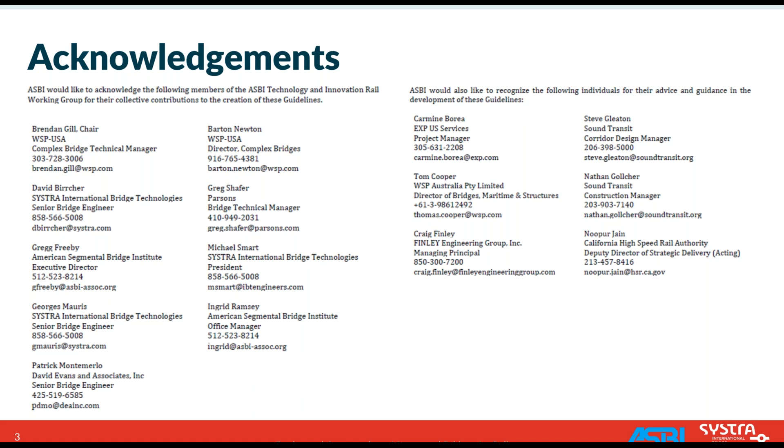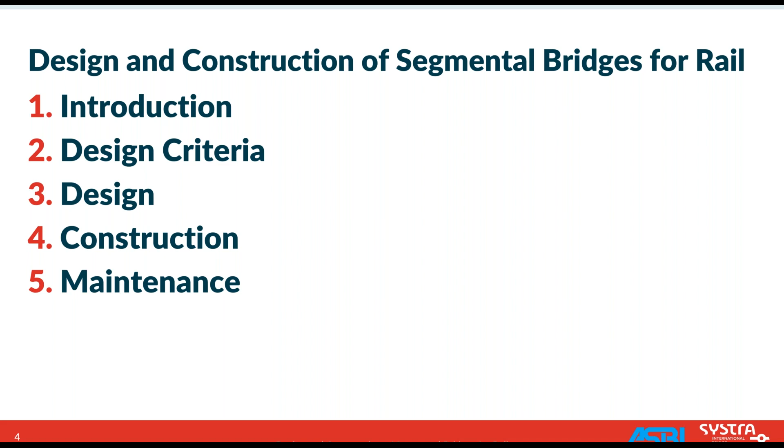So, introduction: everything you know about segmental highway bridges applies to segmental rail bridges, so no knowledge lost there. But there are a few things that make segmental rail bridges unique, and that's essentially the purpose of the guidelines and what we're going to be talking about today. What are those things? It'll be a little scattershot, since there are a bunch of different issues that'll all kind of come at you, but we'll try to hit them one at a time, and hopefully you'll get a feel for what makes segmental rail bridges unique.

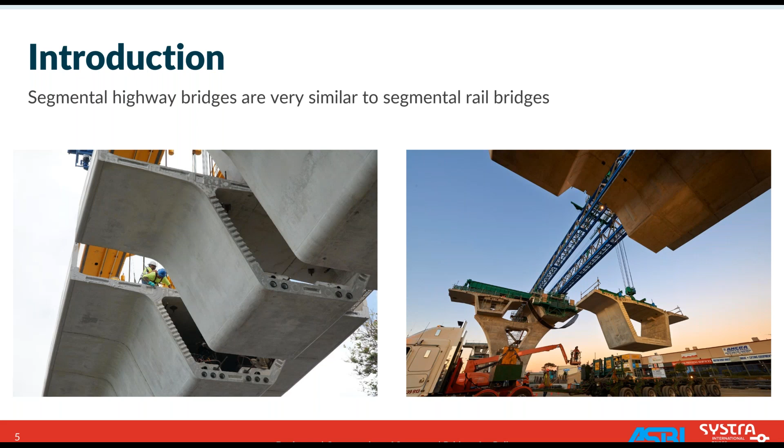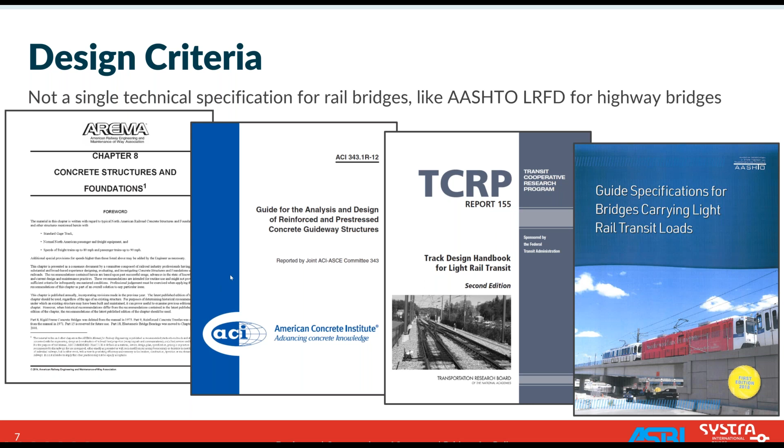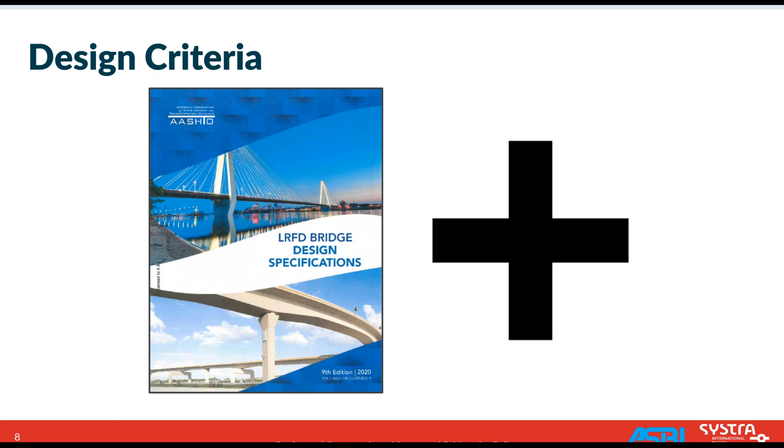So what does that mean? Well, typically you still want to rely on AASHTO LRFD for the fact that it's up to date and constantly being kept state of the art. But things need to be added to it -- there's this 'plus' that needs to be added to accommodate special considerations for rail, whether it's loads, load combinations, or different performance criteria. That typically takes place through a project-specific design criteria.

There are a handful of examples from previous projects and other owner agencies in the guidelines in chapter 3. I have them highlighted there on the screen, along with a handful of important considerations when preparing one of these project design criteria.

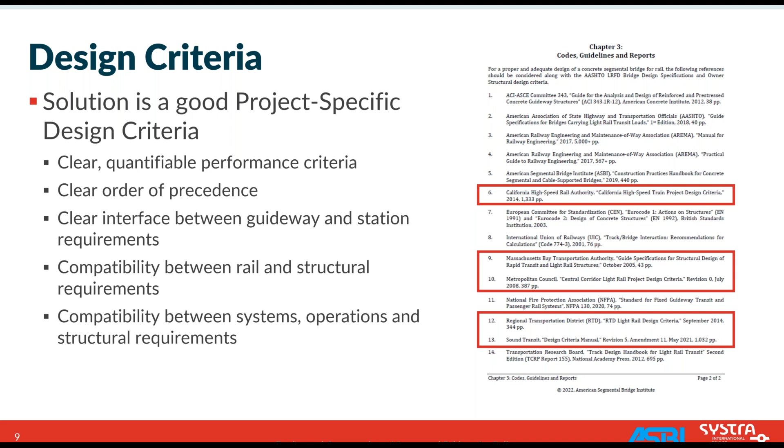Can't emphasize enough the need to do a good job here. You've got to be thorough, you've got to be clear, comprehensive, and there's really no wasted time in preparing these documents, because it'll directly affect how well the project goes. We want quantifiable criteria, clear order of precedence, and some idea of how the guideway and station have different requirements for those structures. What are we designing each to? Which codes? How are they interfaced? Can't emphasize enough the importance of a good design criteria.

Let's talk a little bit now about some design topics, starting with span type. Segmental rail bridges are often simply supported structures in the 100 to 120, 130 foot range, which is very common.

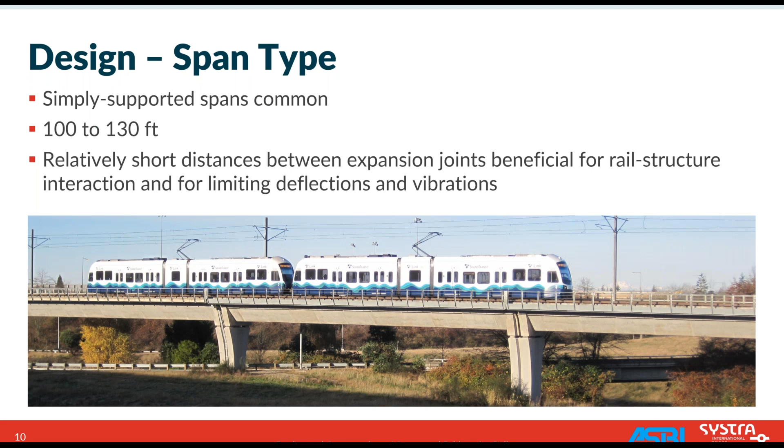These relatively short distances between the expansion joints are good for both rail structure interaction and for limiting deflections and vibrations. They're also easy to construct, which makes them an attractive choice.

One issue that sometimes comes up with these short, simple spans is that rail bridges will have some special track work, whether crossovers or switches. And oftentimes the special track work doesn't work well when it's adjacent to a movement joint, a structural expansion joint that has some movement.

To get around this, we use link slab details. These details have been around for a long time, both in rail bridges and highway bridges, often to reduce the number of expansion joints you might have. Effectively what they do is replace the plinths with a big concrete continuous slab across the joint that the track work can attach to.

Of course, sometimes you have to have a long span structure or a multi-span unit, and that is obviously possible. Some attention needs to be paid to these different performance criteria that we'll talk about in a bit regarding rail structure interaction.

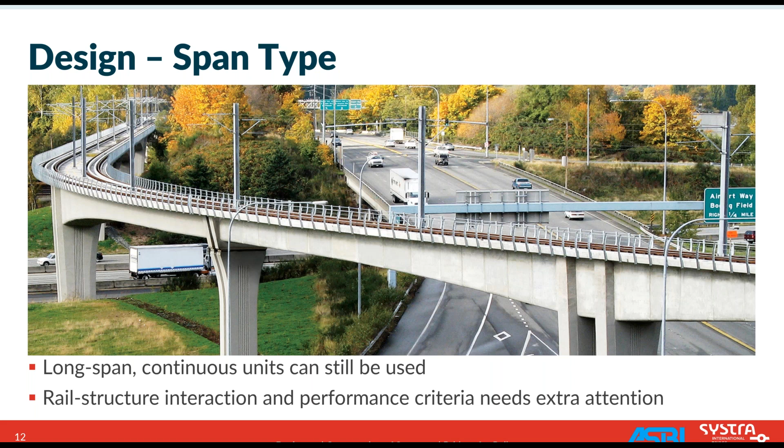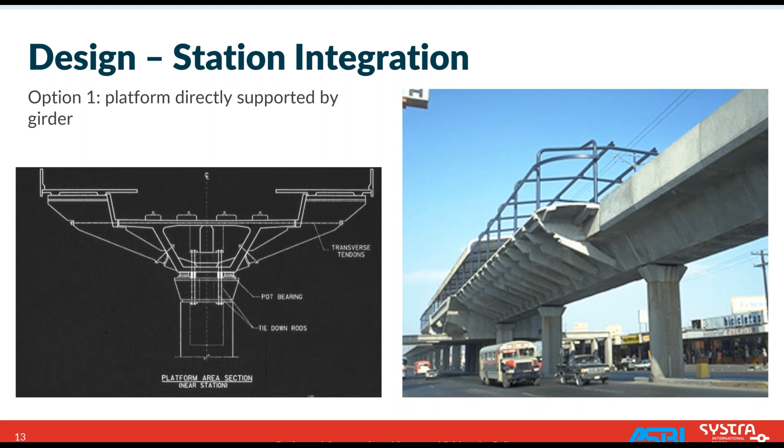Next we'll talk a little bit about station integration. This is obviously specific to rail structures. Typically we classify how the guideway and the station interact by 3 different options. Option 1 is the platform directly supported by the girder - that's pretty self-explanatory, shown in the pictures here.

Option 2 is more of an indirect connection, often happening with a shared foundation. The picture on the left is under construction, but you can see there's a central dual box guideway going right through the middle through these integral hammerhead bents. On either side of the hammerhead bents, you can see concrete blocks that are eventually going to support station platforms on each side of that central guideway.

So this is an outside platform configuration. It's pretty easy on the guideway here because it can just run straight through, with platforms on either side. There's also a center platform configuration shown in the rendering on the right. Here the box is split, so there are single track boxes on either side of the center platform, but this also shares the foundation with the station, and has been successfully implemented on several projects as well.

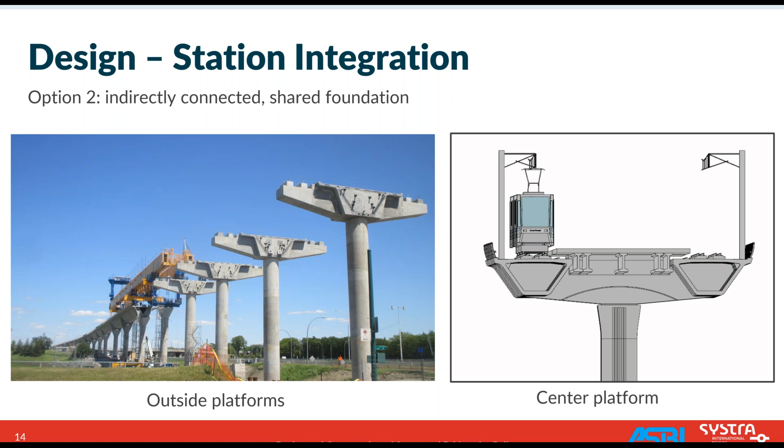I'd say the last category is independent structures. You may have a really large station structure like you see in the picture on the left, where the guideway coming in on the right of the picture effectively stops at the interface with the station. Or you may have something like shown in the graphic on the right, where you have independent guideways and a station structure that don't interact at all.

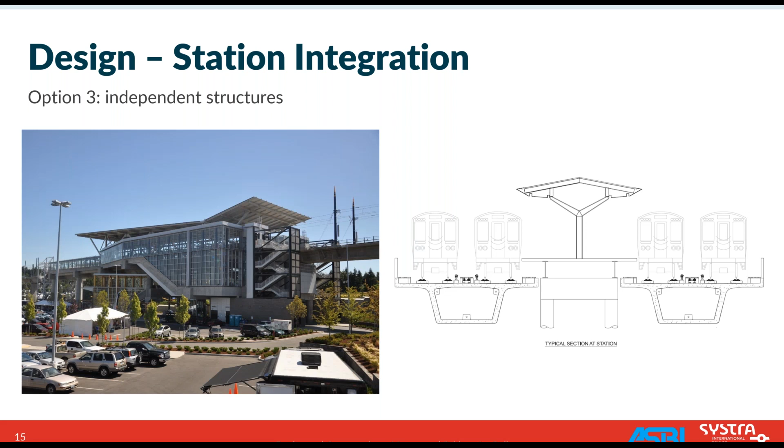So how do we sum up? The issue of a center or outside platform is typically outside of our control, as bridge engineers. Operational considerations will likely determine that. But what you would still want to have is clear design criteria, as we mentioned before. Whose responsibility is it? Who's designing, or what code are we using for what?

That's always a sticky topic, and then it's all about coordination at that point. Coordination is one of those things you'll hear me say a few times today - it's easy to say and hard to do. And it can be even harder if design schedules do not match up.

What does that mean? Well, oftentimes for precast segmental, the design schedule for the segments gets accelerated because they want to start casting segments ahead of time. So what ends up happening is you may need to coordinate with a certain discipline, but you're at 100% design, whereas they might only be at 30%. This makes the coordination job even harder to get what you need out of it. So getting these design schedules compatible is a really important thing.

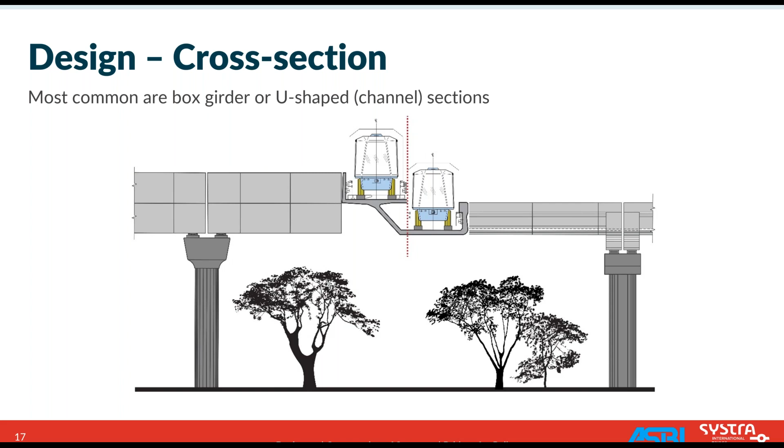They have a couple different configurations. There's a wide U, which is analogous to the dual track box girder you see on the screen. That wide U will support two different tracks. Visually there's a little less depth associated with the U, and it also can accommodate more vertical clearance.

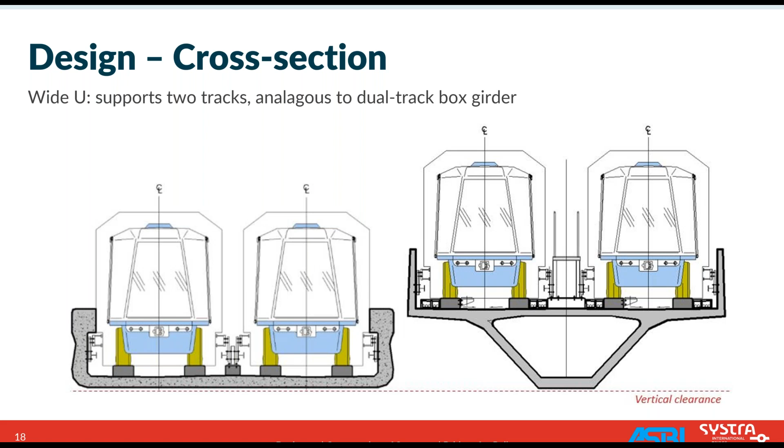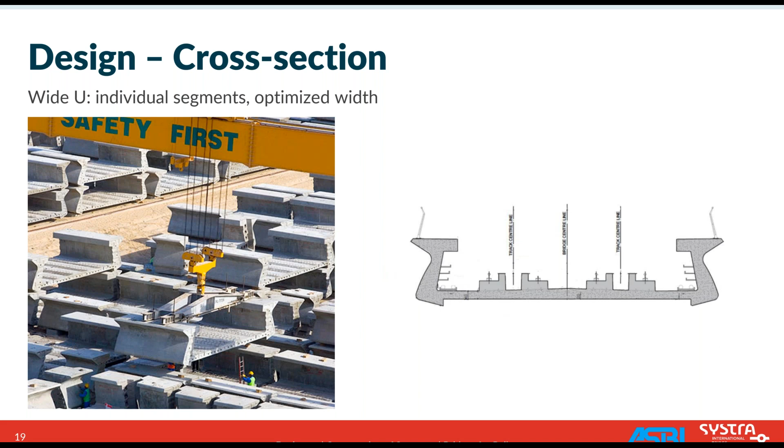The advantage of the U is that integral parapet. The wall of the U is obviously part of the structural section, but it also can serve a couple other purposes. It can support the evacuation footpath, and can also act as derailment protection. So you get three birds there with one stone.

There's also a narrow U configuration. This is more analogous to the single track box girder, and its advantage is it can be cast in single spans, entire spans, and then erected as an entire span. So this can be a very fast, quick way of erecting your bridge. You can see here that they have parallel U's, so you've got essentially a track in each direction, and this is a common system used in other parts of the world.

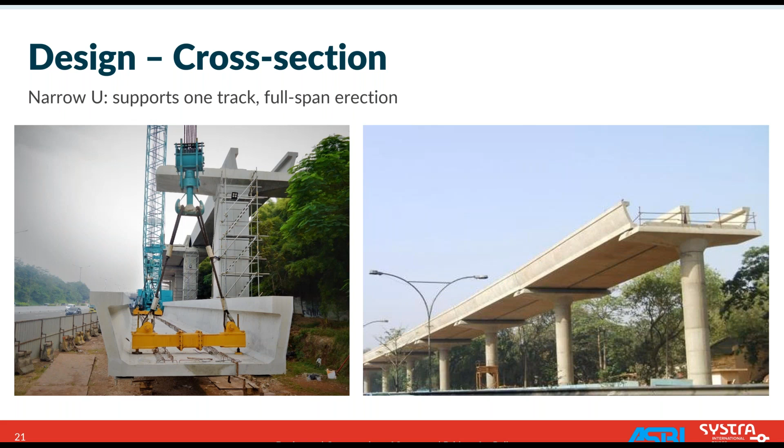One limitation of the narrow U is that when you've got curves, you've got to chord the entire spans. So it limits the radii that this system can accommodate, and/or it'll limit your span lengths. That's a consideration you have to think about with this type of structure.

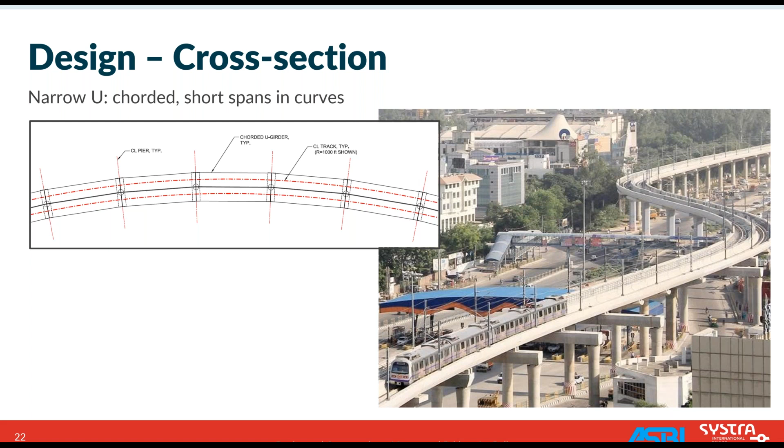To sum up on the cross-section topic: box girders are very structurally efficient, generally more so than U sections, and can accommodate longer spans. Box girders also have that future PT capability we're familiar with here in the US that U girders just do not have. But U sections have shallower depth and can give you better vertical clearance, and they also have that built-in parapet that addresses a couple other issues you need to address. Lastly, the narrow U's ability to be installed quickly is an advantage.

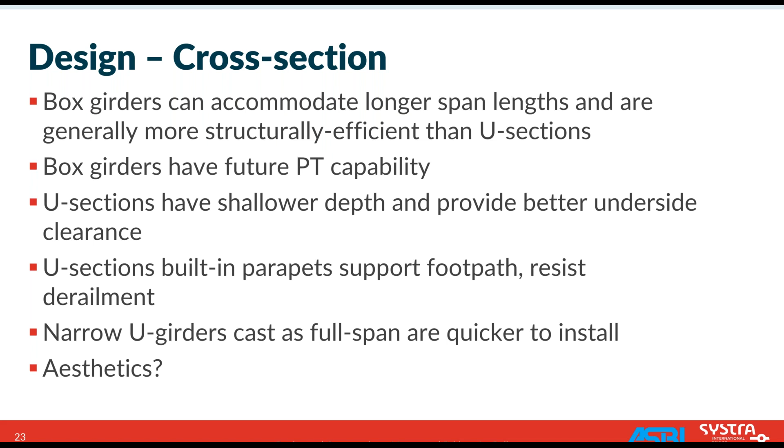Last thing, I wrote aesthetics down here. I purposely didn't really talk about that because it obviously varies person to person, but that could also play a role in your decision of which cross-section to go with.

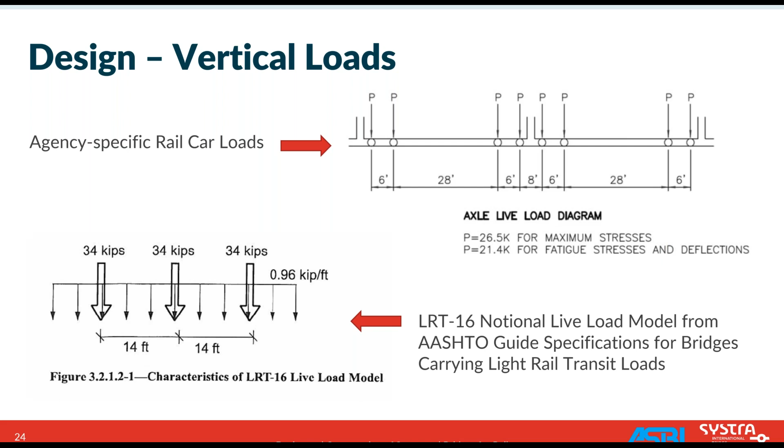Next we'll talk a little bit about loads. Obviously we've got loads to deal with here. They are generally agency-specific rail car loads that you'll get for a specific type of car and vehicle traveling on the bridge you're working on. That's common. In the more recent AASHTO guide spec document flashed on screen earlier, they've introduced a notional live load model that's a little more analogous to the truck and lane load we do for highway bridges, shown in the graphic below. But anyway, it's a similar concept to what you're doing for highway bridges.

There's also longitudinal loads to deal with. We've got braking, like on highways, and we have to deal with that here. There's also acceleration that'll be considered, and effectively you just need to apply that according to your design criteria, consistent with the operational characteristics of the train. Typically it can be additive, so you can have braking in one track and acceleration in another if you have a dual track structure, so don't forget about that.

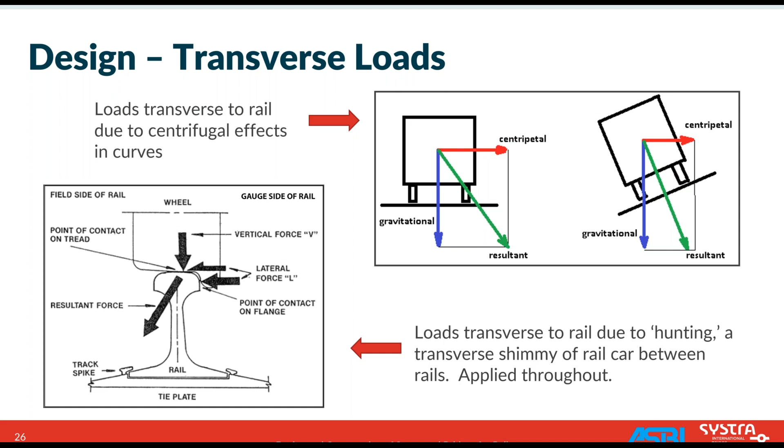Derailment. This is a big one that is obviously specific to rail structures. It can be both vertical and lateral, and generally has a large impact factor associated with it. It should be considered in early stages of design, preliminary design, at bid time, because it can often control some transverse designs of your box. There are anti-derailment curbs that can be used to help limit the locations you have to consider. So keep that in mind as well.

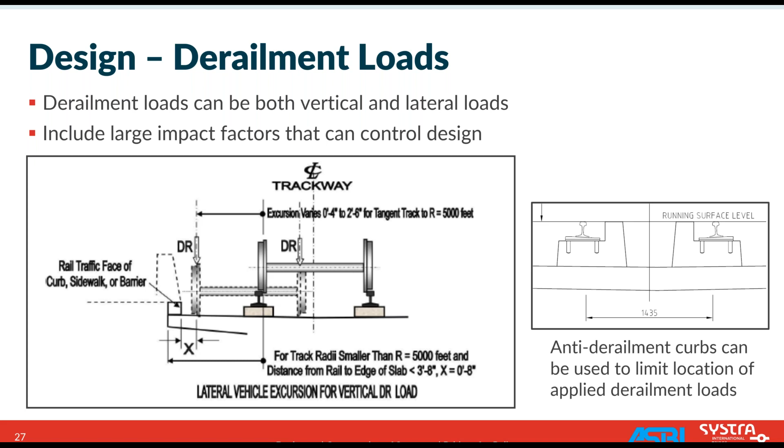Next we'll talk about rail structure interaction. So what is that? Rails are typically continuously welded rail, the most common type nowadays. It's rail that's been welded together and is continuous across structural expansion joints of your bridge. So you can imagine when that bridge wants to move and expand at those joints, the rail is going to restrain it to some extent, or there's going to be some interaction between the structure and the rail.

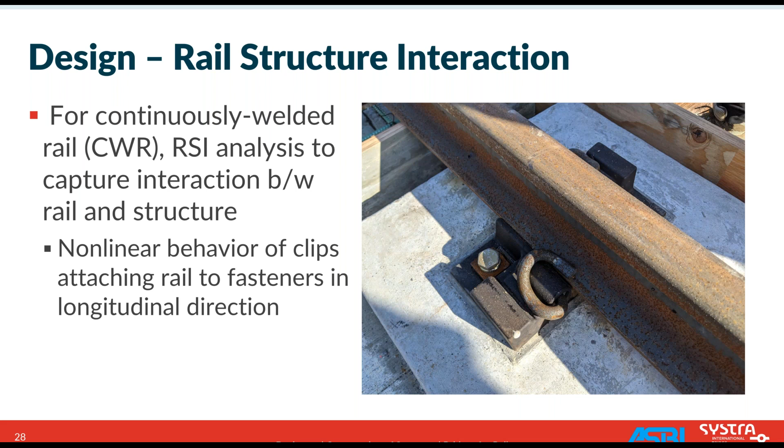That interaction is controlled a lot by these fasteners. Specifically in the longitudinal direction, there's a nonlinear relationship between the connection of the fastener and the rail, having to do with that little steel spring clip you see there. It's basically linear up to a certain point, and then when it reaches a certain load, it'll slip. So we've got a complicated interaction to address, and we do that with a rail structure interaction analysis, a nonlinear analysis where these connection points between the rail and the box are modeled explicitly.

There are typically three things we want to get out of that analysis. The first is we want to make sure we don't overstress the rail. In that design criteria we talked about, there should be clear load cases or loads that you have to consider for this effect.

I should point out that the design of the rail itself is the responsibility of the track designer. But typically what they'll do is give you a certain percentage of the capacity of the rail, an allowable stress that us bridge designers can work with, because the track designer doesn't know anything about the configuration of the bridge, the distance between expansion joints, the movement of the structure, that sort of thing. So for these particular loads, we'll apply those to our RSI analysis, get a delta stress in the rail from those loads, and compare that to the allowable to make sure we're not overstressing the rail for the stress that's allocated to us.

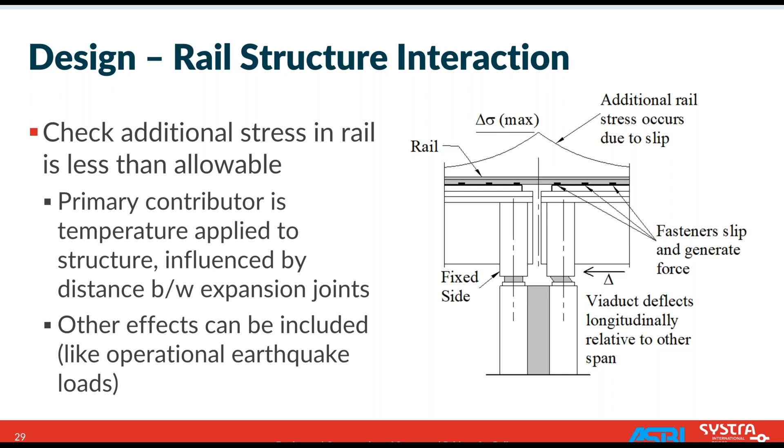The second thing you might typically be looking for in an RSI analysis is investigating rail break. This means there's a different load case where we're trying to maximize the tension in the rail, including temperature effects from the rail itself. So we maximize the tension in the rail, and then as part of this analysis, we analytically create a break in the rail and see where the force in that rail redistributes.

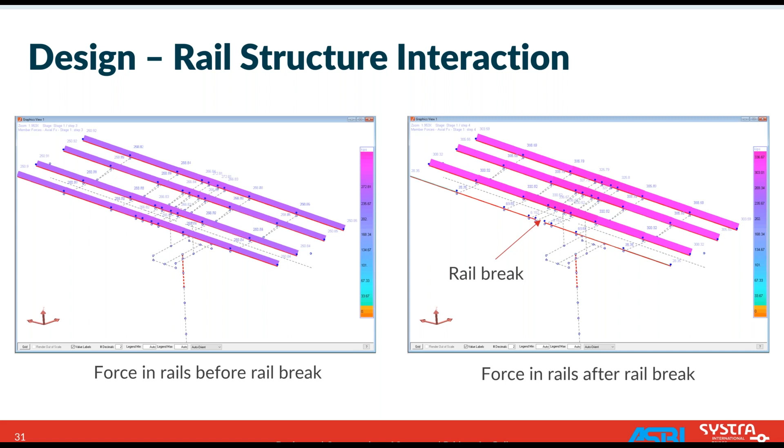The screenshots I'm showing here: the figure on the left shows forces in the rails before rail break, and the figure on the right shows the forces in the rails after the rail break. We want to look at how that force redistributes through the structure and make sure there are no issues with that redistribution. But also, that tension in the rail has to go somewhere - it's being transferred to the box, to the other rail components through those slip fasteners we talked about. What that does is create a gap in the rail, and that distance, the measure of that gap, is something we want to control. There's going to be an allowable limit in the criteria you have to satisfy, intended to mitigate against derailment if one of these rail breaks were to occur. So that's the second category of things you'll be looking at in your RSI analysis.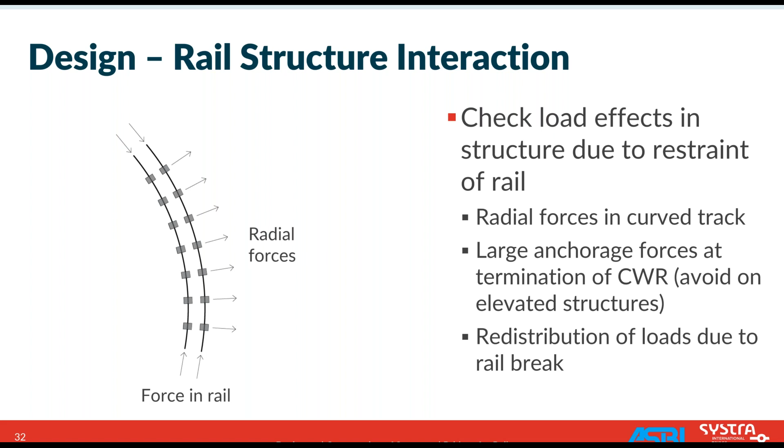And then the last thing, kind of touched on in the previous slide: the restraint that the rail provides is going to generate forces in the structure. These forces need to be combined with all your other forces from other load cases, and those components need to be designed accordingly. There's going to be radial forces if you've got curved rail. And in the unlikely event you have a large anchorage force because the rail is terminated on your structure—which is not advised, you do not want to do that—but if you can't get away from it, there's going to be a large anchorage force at that termination point that goes into your structure, and your structure needs to be designed for it. So this third category is about what this restraint is doing to the structure, and making sure it's designed for it.

Okay, so that's the RSI stuff. Let's talk about another sophisticated analysis: vehicle structure interaction. What is this and what is it for? Because our rail cars are traveling repetitively over our bridges at predetermined loading frequencies, we want to make sure those loading frequencies don't line up with the natural frequencies of the bridge. This is typically handled a few different ways. There are hard limits on deflection that effectively ensure the structure has a certain stiffness. They also typically require that the minimum frequency for the first mode of vertical vibration, the natural frequency of the structure, is at least a minimum value—2.5 hertz is a typical number. They may also require a specific analysis, or if you don't meet one of those limits, you have to do the analysis. Essentially, they may require a vehicle structure interaction analysis, sometimes called a rolling stock analysis. So what is that?

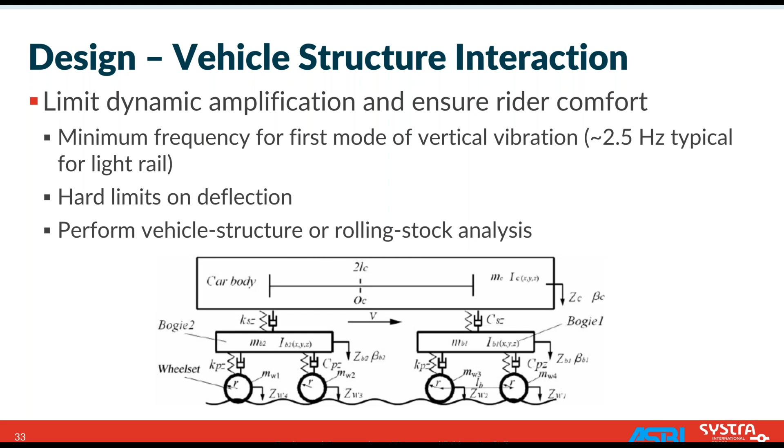That's a time history analysis where we're looking specifically at the dynamic response of the structure. The vehicle traveling at different speeds will have different loading frequencies, and if those loading frequencies line up or match the natural frequencies of the structure, we're going to get some dynamic amplification. You can measure this in the analysis and compare that amplification to the impact factor you're considering in your design, and you want it to be less than that impact factor to move forward. That's one thing you'll do. Another thing you'll do from the analysis is look at the acceleration of the structure itself due to these different loading frequencies, and compare it to an allowable value meant to safeguard rider comfort. Those are two things that typically come out of this analysis.

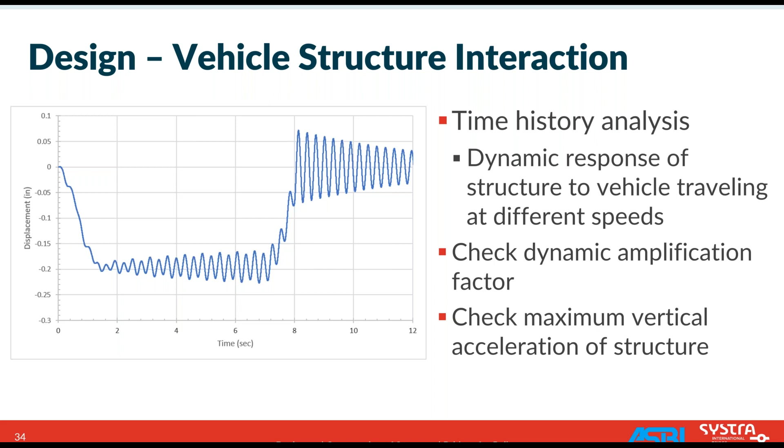Next, we'll talk a little bit about seismic. Seismic is generally similar to the approach you'd do for a highway bridge. There'll be a maximum considered earthquake that you want to avoid collapse under, and then there'll be an operational basis earthquake—a smaller earthquake that you want to remain essentially elastic under. Talking about that RSI analysis from a few slides ago, there often will be a stress limit on the rails that you'll have to meet under this operational earthquake. So you have to incorporate some earthquake loads in that RSI analysis.

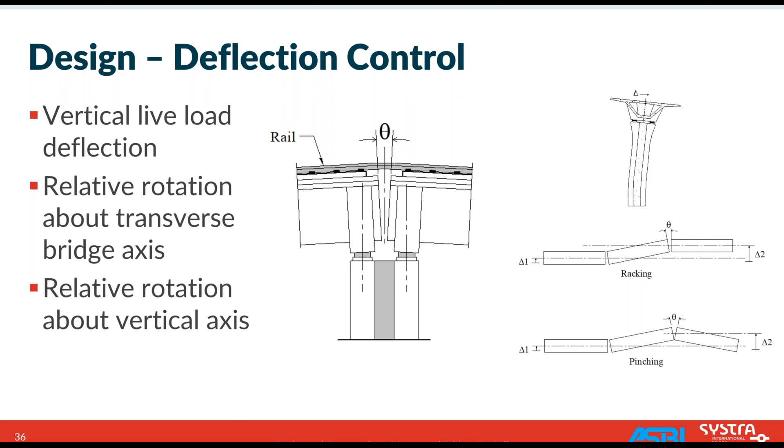Next, we'll talk a little bit about some deflection limits. Highway bridges have deflection limits as well, but there are a few more constraints, or criteria, to meet for rail bridges. We've got a vertical live load deflection—not surprising. But then there are these rotation limits that typically occur, or are required, at expansion joints. That's meant to both safeguard the rail and safeguard the operation of the vehicle. Both of these limits need to be satisfied.

A couple other deflection related criteria typically show up. We talked about stations previously. If you've got an independent station structure, independent from your guideway, you'll want to check differential deflection - there should be something in the criteria about this. When someone's getting off a rail car and stepping onto the platform, you don't want them tripping or falling, so there needs to be a limit on that.

And then the last deflection limit that shows up has to do with creep. When the bridge is erected, plinths are cast, rails are installed - they're going to be at their theoretical alignment, within the tolerances set forth for that. But over time, concrete segmental bridges, any post-tensioned or pre-tensioned bridge for that matter, is going to creep.

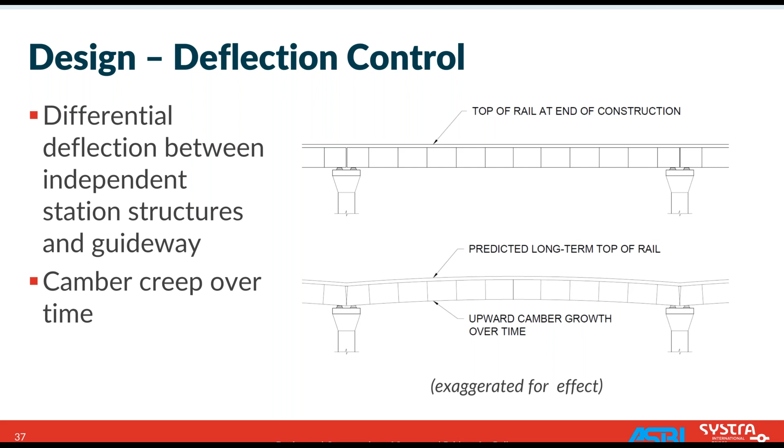Okay, and then the last design related topic I've got is systems integration. This is a bit of a catch-all slide. Some of these things might not be classified as systems, but basically what it's meant to convey is there's a lot of stuff on a rail bridge, more so than on a highway bridge, and those things need to be coordinated and accounted for.

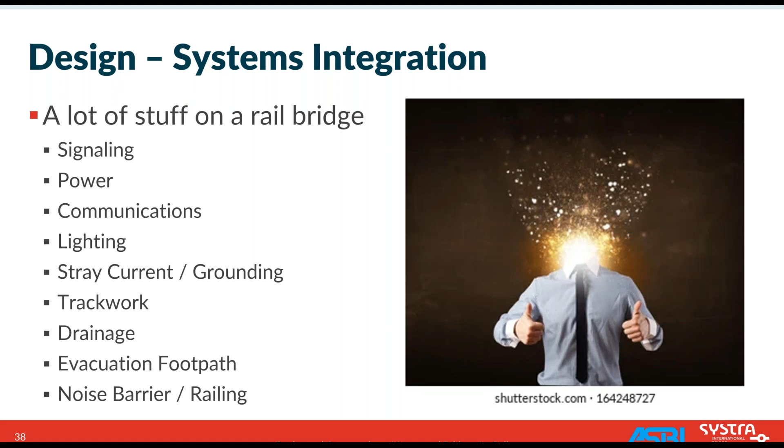Similar with the station stuff, coordination is everything, and it basically amounts to education. You're going to be trying to educate other disciplines on what a segmental bridge is, what the constraints are, what things are important and what things aren't, and similarly, they're going to do the same to you for all their stuff. Again, compatible design schedules make this coordination possible - without that, it makes it really difficult. So these are some considerations to think about.

So this is the kind of example where, if we need to put in a bolt, embed some anchors, put in some sleeves - these aren't huge deals. We need to know about them, but they're not huge deals. If it's requiring us to widen the deck or add a strut or something like that, these are a bigger deal. So you want to educate these different disciplines on what's important and what's not, so you can identify those things as soon as possible.

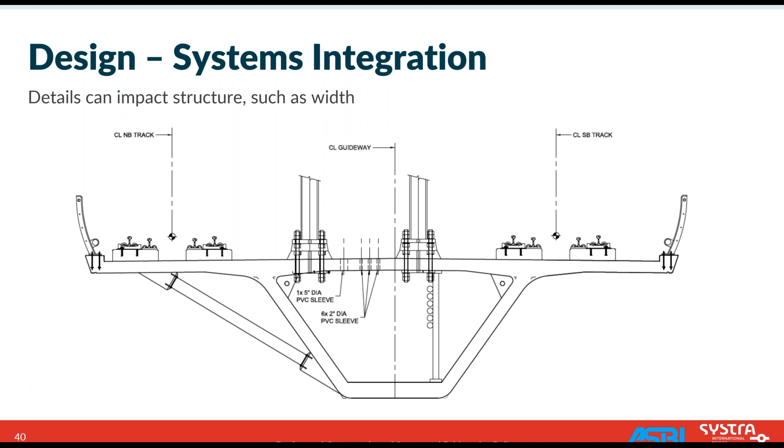Stray current - won't get into the science on this, I'm not really qualified to explain it - but effectively what it amounts to is rebar in the plinths and rebar in your deck generally are all tied together or welded together so that any stray current that does leach into the structure can get collected through this continuous bit of rebar and then collected with a longitudinal collector cable, a copper cable that runs the length of the bridge and links segment to segment and span to span, and eventually drops down to the ground somewhere.

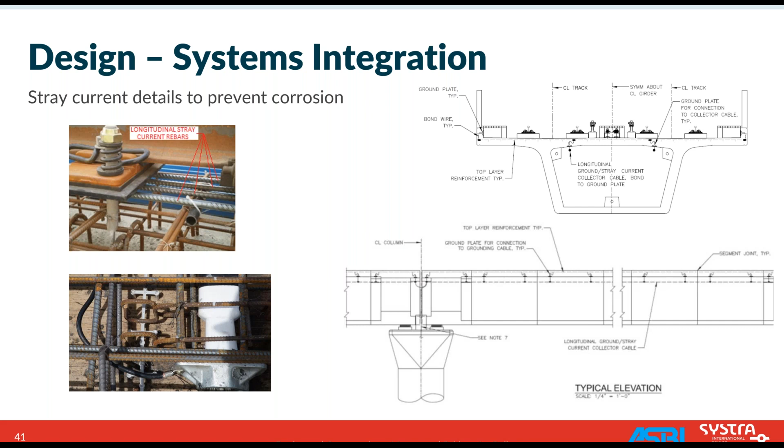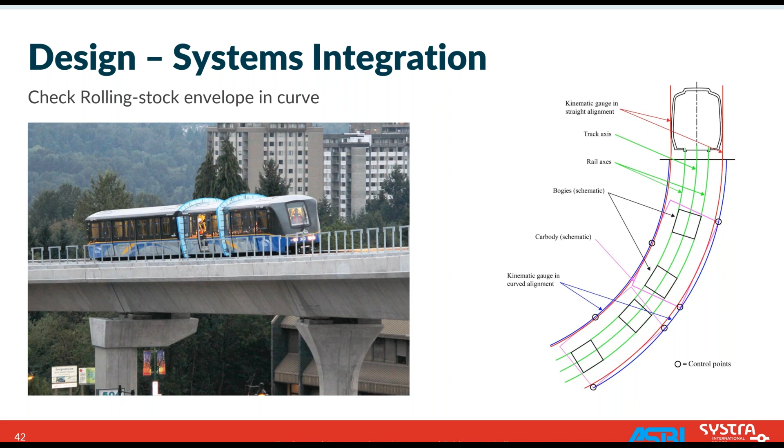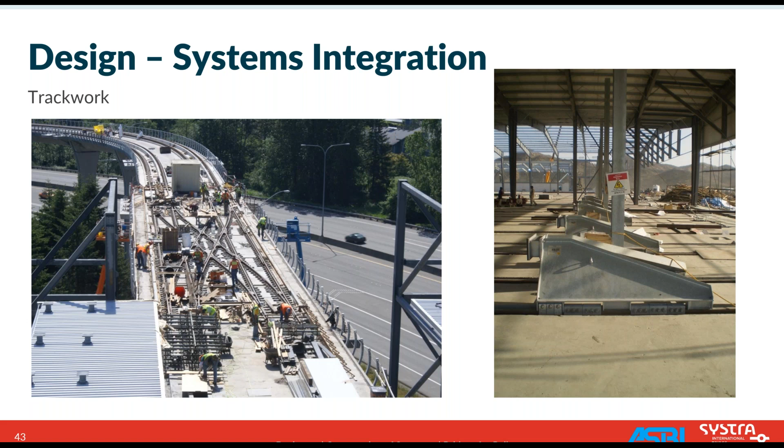The picture on the right is a friction buffer stop. It's only needed when the rail terminates. It doesn't happen often on elevated structures, but if it does, there are typically some large loads associated with that, so those need to be accounted for.

Okay, that does it for the design section. Let's talk a little bit about construction.

Geometry control is essential for any segmental bridge, but probably more so for rail bridges. The tolerances are a little tighter. The rail alignment, or one of the track alignments, will control the geometry of the box. So that's how that's handled.

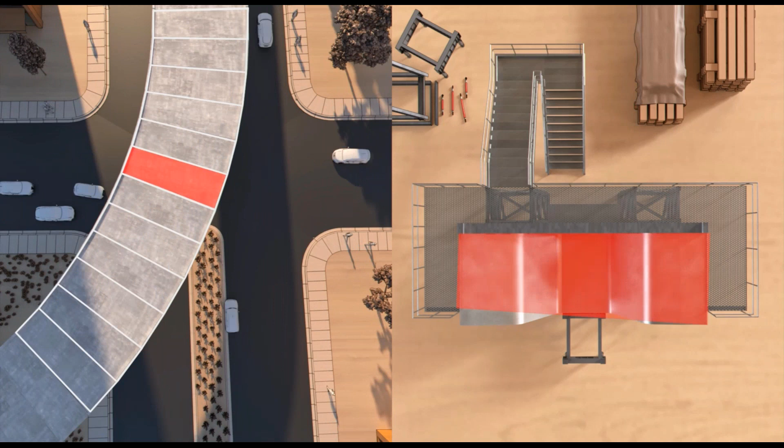The picture on the right illustrates how segments are cast to accommodate that curve. Effectively, the segment in red is the match cast segment, and that segment gets rotated to accommodate and create the pie-shaped segments that are needed.

So again, nothing new—this is true for all segmental construction, but it illustrates how segmental can accommodate the tight radii that often come up.

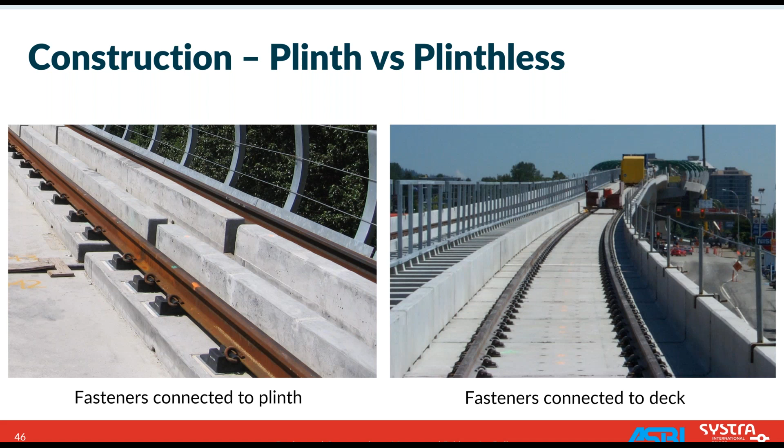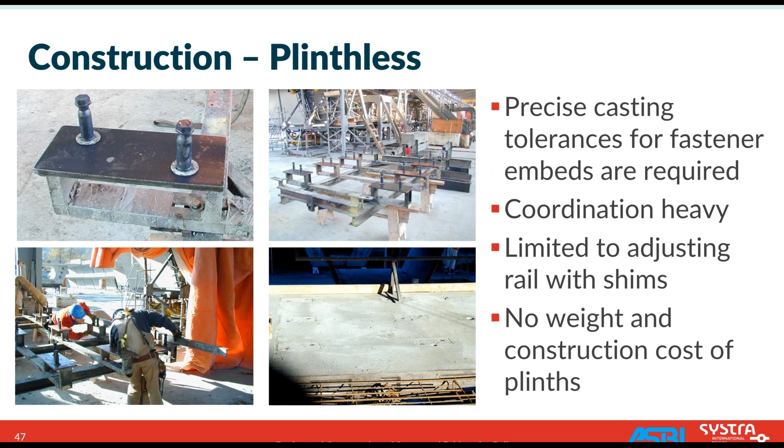Because the tolerances and the ability to adjust later is minimal, there are shims that can be done, but there's a limit to how much it can be shimmed. So it needs to get done right the first time. But if you can achieve it, then you don't have to deal with the weight of the plinths and the construction costs of the plinths.

Plinths give you a little more precasting and erection tolerance. Super elevation can be handled with plinths—you don't have to deal with that with your segments.

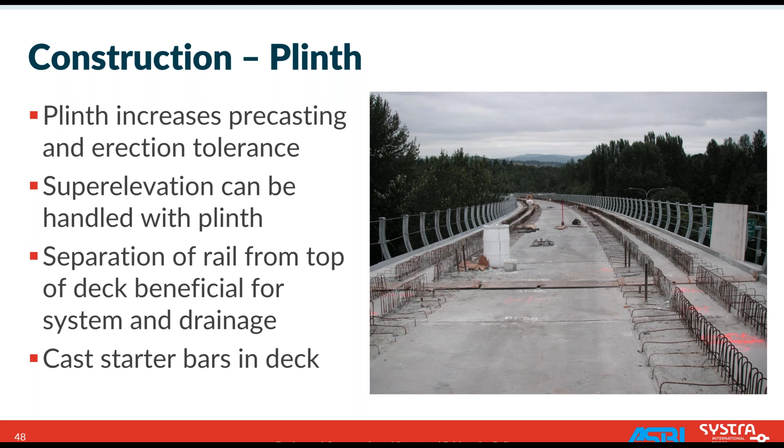The separation of the rail from the top of the deck is beneficial for both system and drainage issues. So that's another advantage. You do have to put the starter bars in the segments in the precast yard, so we'll have to coordinate that and get it in the right spot—but much less tolerance than the embeds for the fasteners themselves.

Speaking of embeds, as we mentioned on the design side, there's tons of stuff on the deck, and that stuff needs to generally be located in the precast segments and placed there. So here are some examples of that.

Here we're showing a signal head. There's an anchor for that which needs to get located and put in the segment so that it's in the right spot when those segments are erected.

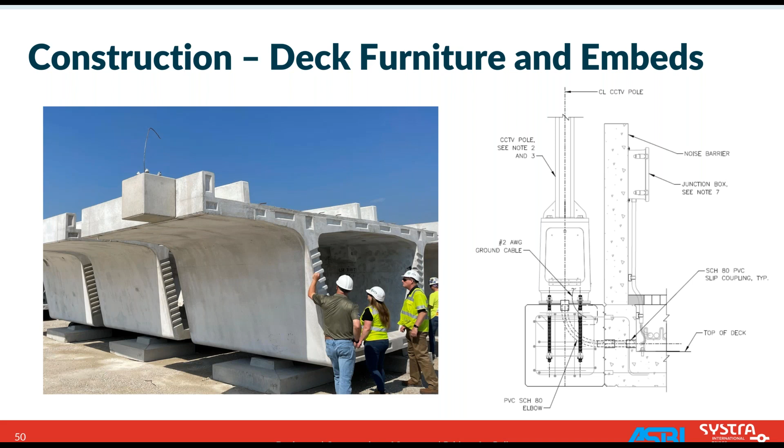Another example here—this is one of many, but meant to illustrate that there's a lot of stuff, and that stuff needs to be located in the segment. Here we're looking at a secondary pour block that was cast against the exterior curve of the box girder to help support this CCTV pole. There are obviously form savers and sleeves in the precast segment that need to be located appropriately to get that spot right. So again, one example of many to illustrate that there's a lot of coordination needed on the construction side as well.

Okay, so now we've got all our segments cast—what do we do with them? The good news is we're going to erect them the same way we would erect a highway segmental bridge, with a lot of the same equipment. You can see a couple examples here using erection gantries. This is a common way for span-by-span construction, and like in highway bridges, linear construction is typical.

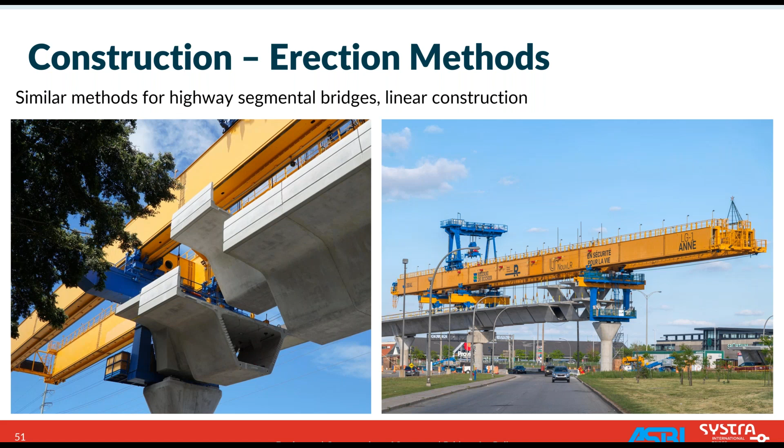With rail bridges, similar concepts apply to what's done for highways, but oftentimes with rail bridges you might run into some of these things a little more often. You might have sharper radii to deal with, curved alignments because of different situations on the ground, and variable substructure types to help accommodate getting the guideway over certain things. Your erection equipment needs to accommodate all that. Nothing terribly different or new, but important.

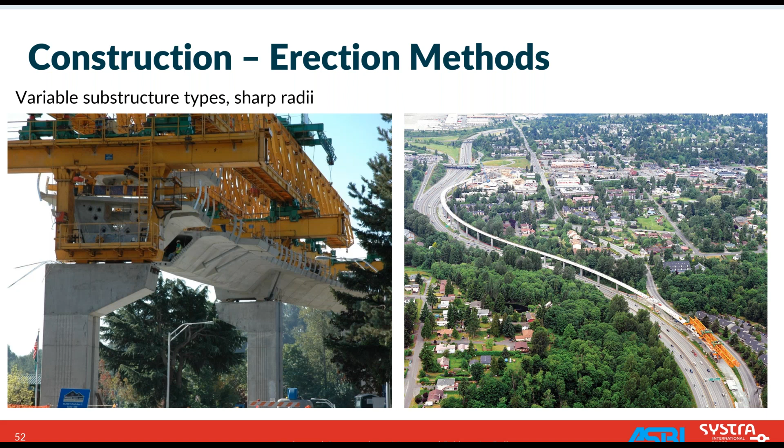Next slide here, urban settings. Rail bridges are oftentimes in urban settings, so your equipment has to accommodate that. Here we're in downtown Chicago, and you can see the challenges of having to navigate that erection gantry in this kind of situation. But you can also appreciate why they decided to go with precast, because they can move a lot of those construction activities to a precast facility offsite, and that was the motivation for the desire to go segmental for this job.

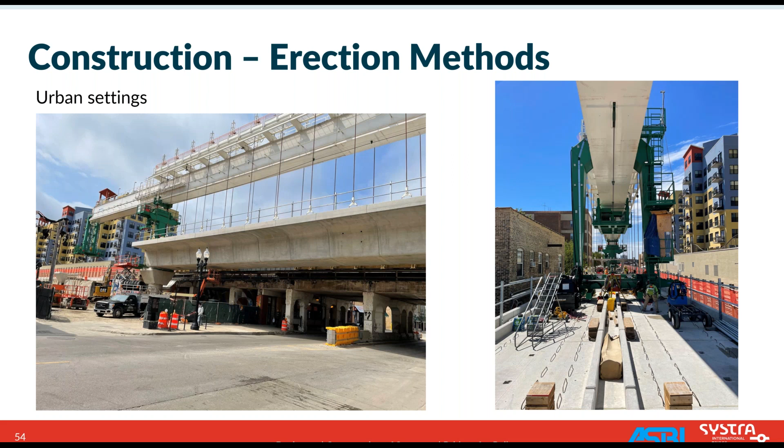All the previous slides were talking about individual segments getting erected, but of course there are some full span erection schemes as well. You can launch a full span like you see in the picture on the left. And as we talked about with the narrow U, there's the ability to erect those full spans as well, in this case picking with a couple of cranes.

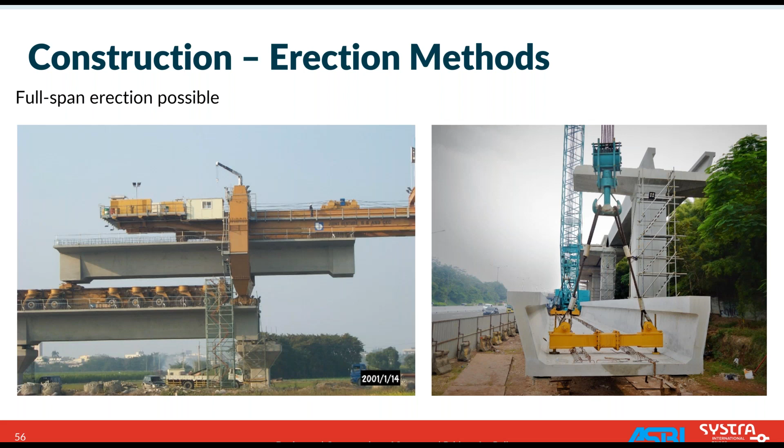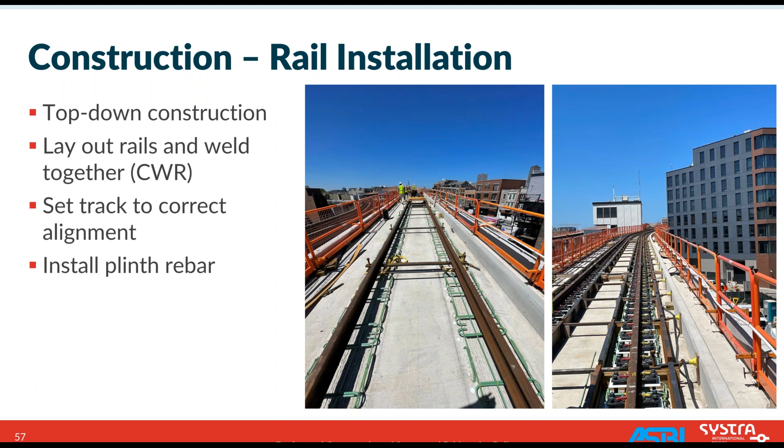Last item here on construction stuff is rail installation. Typically it's done top down. The rails are all laid out, and if they're CWR, they get all welded together. They can then be aligned and set precisely to where they need to be. The plinth bar can get installed anytime in there, and then we want to get the fastener inserts in the right spot.

Typically that's done with templates that are temporarily attached to the rail, like you see in these pictures, and really it needs to be done precisely to get those inserts in the right locations. Then the formwork for the plinths can be installed, and the concrete can get placed. This whole time the rail alignment and location are being continuously monitored and tweaked.

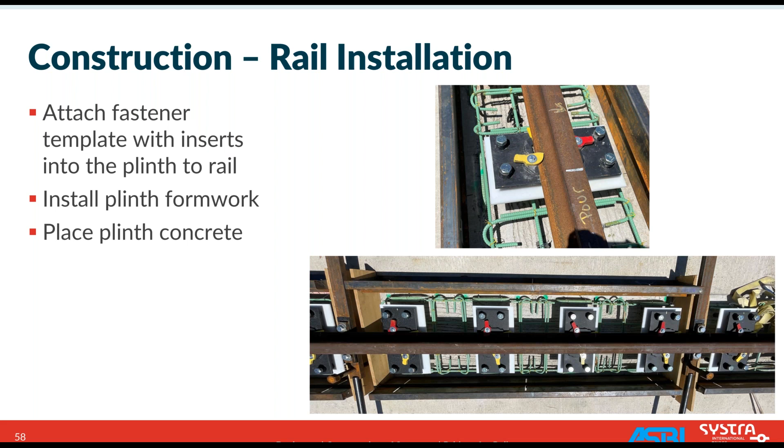After the plinths are cast, you can go back and install the permanent fasteners. Typically they'll then be partially clipped in place, and they won't get fully clipped until the rail is heated up to its neutral or stress-free temperature. We didn't really talk about this in the RSI analysis, but this is a temperature that the rail needs to be at when those rails are fully clipped, and it's an input into your analysis, so it needs to be consistent with what they're planning to do.

Once those rails are fully clipped, then you move along. But once you get to the leading edge of your rail installation, you leave several hundred feet that's only partially clipped. The reason for this, as hinted at earlier, is you don't want to terminate a fully clipped rail on an elevated structure, because it's going to impose a lot of forces due to temperature onto the structure. So you typically spread it out over hundreds of feet and partially clip it to smooth that termination. The point here is the rail installation plan should be reviewed by the engineer, to hopefully assess any impact it may have on the structure.

Okay, and with that, I'll touch into some maintenance issues. Not my background, but I'll do my best here to cover some of the important topics.

An operation and maintenance manual is a good idea, so that should be part of the project deliverables. It gets everybody thinking about maintenance considerations during design and construction.

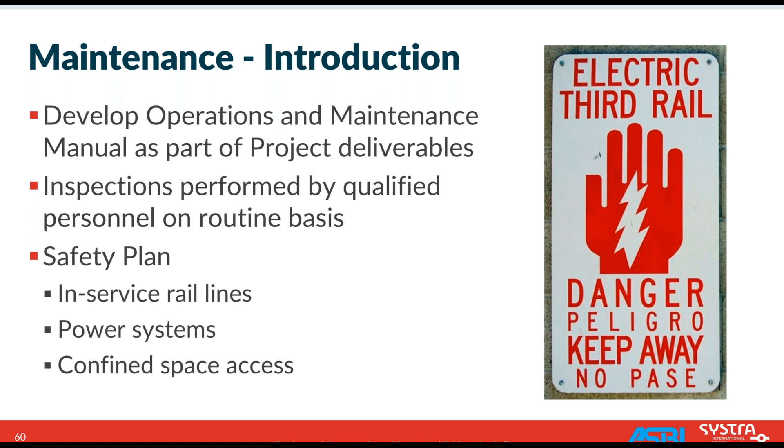As we'll talk about, it's a little harder to temporarily shut down rail lines when doing inspections, especially during revenue hours. So oftentimes these inspections take place when the rail is in service. It all needs to be planned accordingly, and safety measures need to be taken.

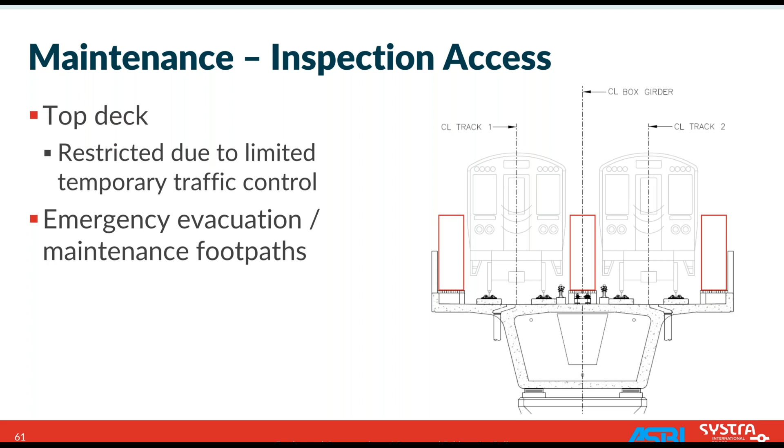So getting inspection access - what do you do? You need to get to all aspects of the structure. From the top deck, typically that's done through the emergency evacuation footwalks you already have. Those can be used by maintenance people to inspect and walk the track as well. As mentioned, there's probably limited opportunity to reduce traffic, so there's a lot of traffic up there.

Of course, if you have a box girder, you've got to get inside it. Bottom access hatches are preferable, largely because top access hatches can often be in the train envelope, and you don't want to risk that. So like all box girders, access needs to be provided at regular intervals to every span, either through access hatches or through openings in diaphragms to get everywhere.

I don't have details on this, but whenever you go inside a confined space like this, there are requirements. OSHA has a bunch of them, and specific training and sometimes even specific equipment needs to be utilized if you go into one of these confined spaces.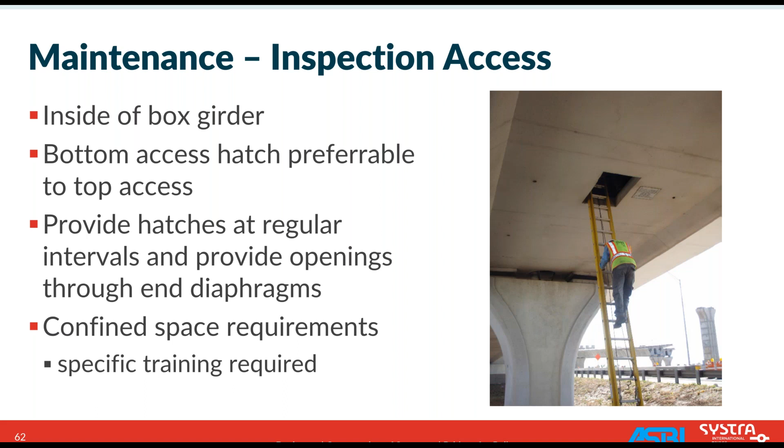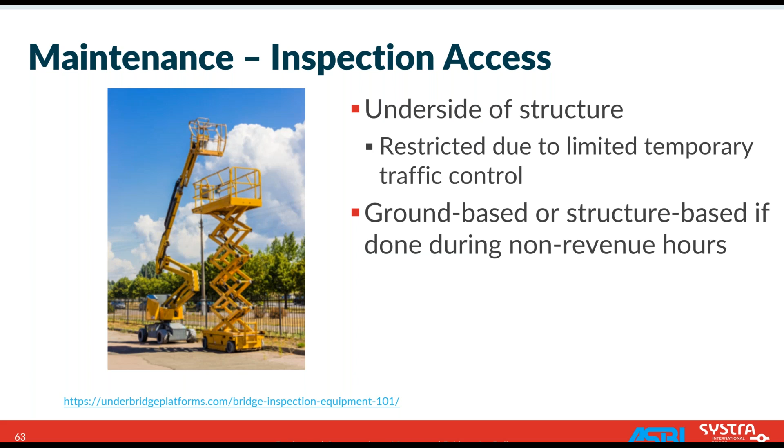And then we need to look at the bottom and outside of the box too. This is done conventionally, usually with man lifts or bucket trucks. Like I said, it's often better if possible to be done from ground-based equipment, so you don't have to mess with the traffic overhead.

So once we're checking out the bridge, what are we looking for? Well, the same things you'd look for on a highway bridge or any segmental bridge - cracking of the concrete, spalling, signs of moisture, signs of corrosion, delamination, anything like that. We're going to spend a lot of attention on post-tensioning - any kinks, signs of moisture, can do some sounding as well. All stuff that's typical for any maintenance manual.

Again, like any other bridge, there are expansion joints and bearings, and we want to take a look at those - no different for a rail bridge, except there may be a few more of these, more joints and more bearings to look at. And there's going to be CWR crossing those joints, and that should be given close attention. Let's look at that CWR - look at the rail, any signs of distress or cracking needs to be noted, of course.

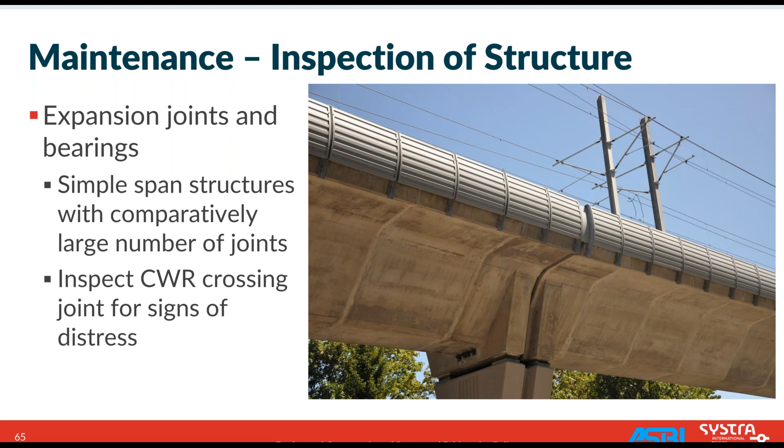That brings me to inspecting the rails. Of course, you have to inspect them, inspect the fasteners, inspect the plinths - all these things need to be looked at. The rail alignment, like we talked about, can change a little bit over time. It can wear down; it needs to be inspected and monitored.

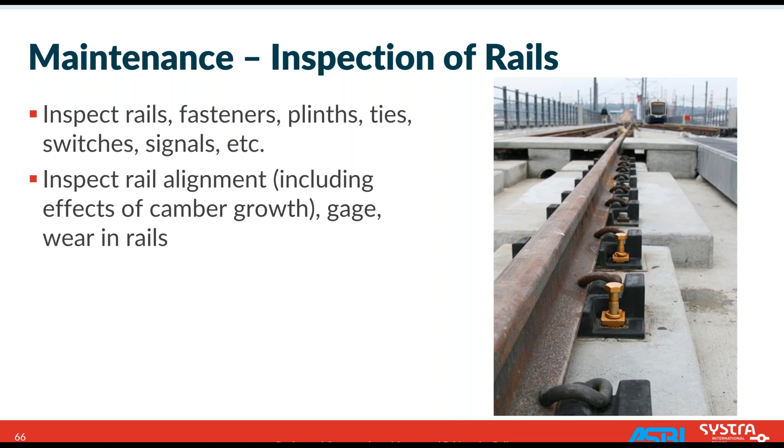Power systems have a whole slew of inspection items associated with them as well. Anybody up there on the deck, whether inspecting the power systems or not, needs to be well aware of the safety considerations. You generally always assume that the third rail or overhead catenary system is energized, unless you know it to be powered down and locked out. Typically, you're going to use non-conductive equipment to help safeguard against that, and you'll be looking at everything from the system itself to any support components.

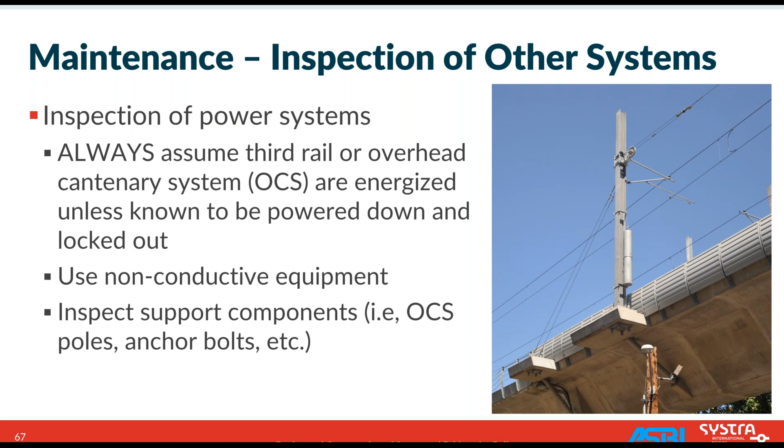Other systems—a bit of a catch-all here, but as I mentioned, there's going to be tons of cable trays, hangers, conduits, cables, all sorts of things running along the bridge and supported from the guideway. These things all need to be looked at. Pay particular attention to where they transition from superstructure to substructure, or where they cross expansion joints, because there's differential movement, and you want to make sure those systems can allow for that.

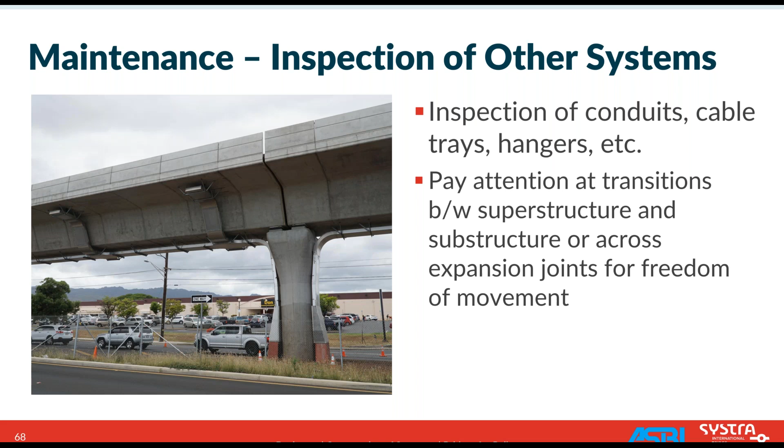I talked a little bit about stray current previously. Here, it's just important that inspectors also know what this system is, and that every part of the system needs to be in place for it to function properly. Copper cables are a theft target, so be aware that all this stuff needs to be in place.

Last topic here is bridge cleanliness. This applies for all bridges, but can be a little more important for rail structures. Debris and sand tend to accumulate a little faster on rail bridges than roadway bridges, and that debris can accelerate degradation of the deck. As you can see in the schematic, a lot of the equipment mounted to the deck needs to be isolated with pads, bushings, or washers. If there's debris accumulation, that can negate the isolation, and you don't want that.

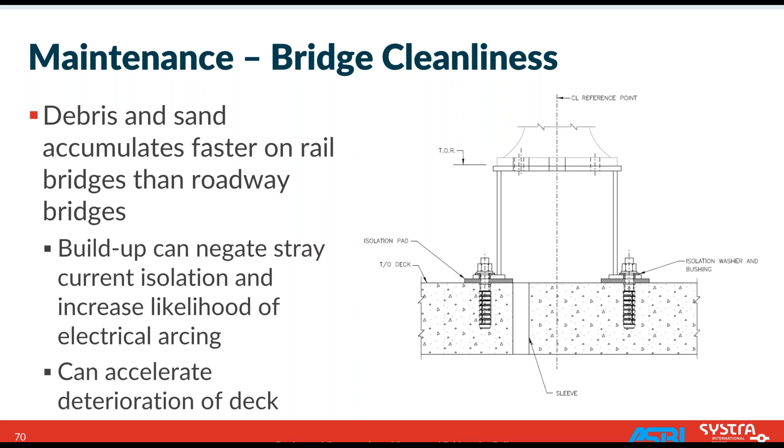So that heightens the need to keep that bridge deck clean. Hopefully some of these topics will help you identify some things that are unique about rail bridges and help you on your next concrete segmental rail bridge project. So with that, thank you all for your time, and I'll stick around for some questions.